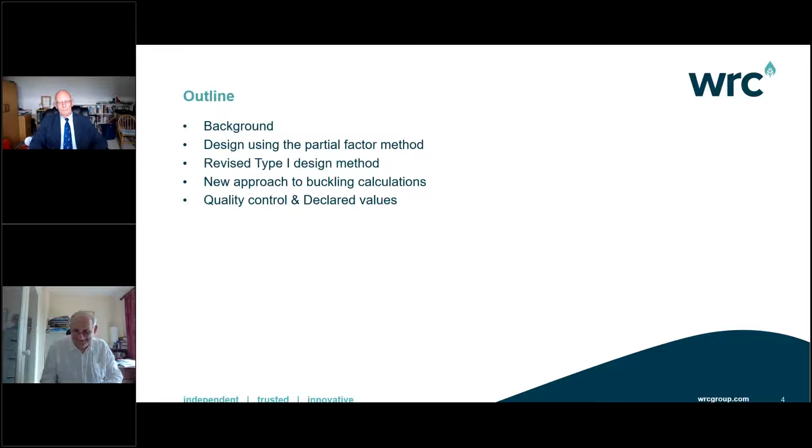I'm going to go through just a brief introduction to SRM for those who are not familiar with it, and then look at some changes to the design methods, and then finish up with a bit on quality control.

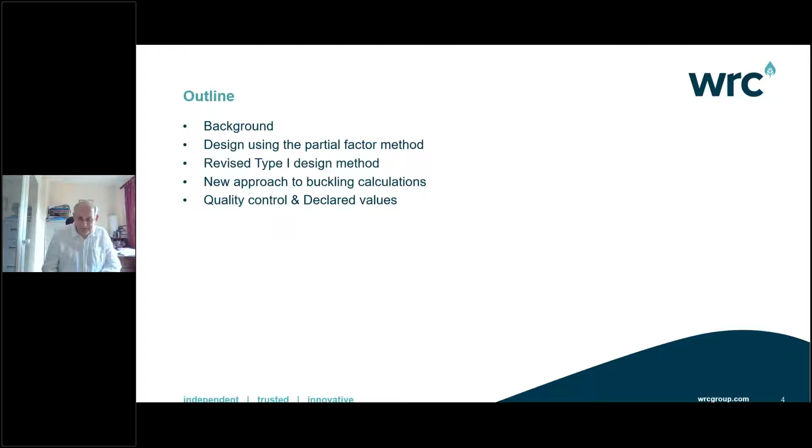So first of all, the background. I remember in 1983, my boss bringing me this red book and putting it on my drawing board, saying, I think you need to read this. That was a long time ago. It's now in its 6th edition, which is only available online at the moment.

There's been relatively few changes to the calculation methods since that 1st edition. This new 7th edition, which will be in a book, changes that.

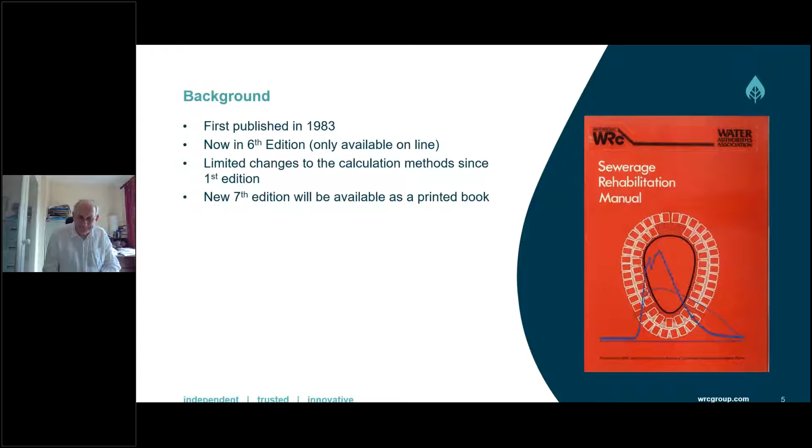So first of all, changes to the design methods. We're moving to design using the partial factor method. So most structural design methods for sewer liners in Europe now use a limit state approach using partial factors. The sewer renovation design methods in France, the ASTEE, and in Germany, the DWA method now use this approach.

Also, we're applying the principles of the Eurocode design approach. This isn't a Eurocode design, because for it to be a fully compliant Eurocode design, there would have to be an appropriate part of EN 1990 series to match it. But it's taking the principles out of EN 1990 and applying them to this design method.

It offers a better understanding of the variability of the material properties, which, given that some of the materials are cured in place, either as grouts or as a cured in place liner, is quite important. Someone's described it to me once as complex chemistry in the bottom of a trench.

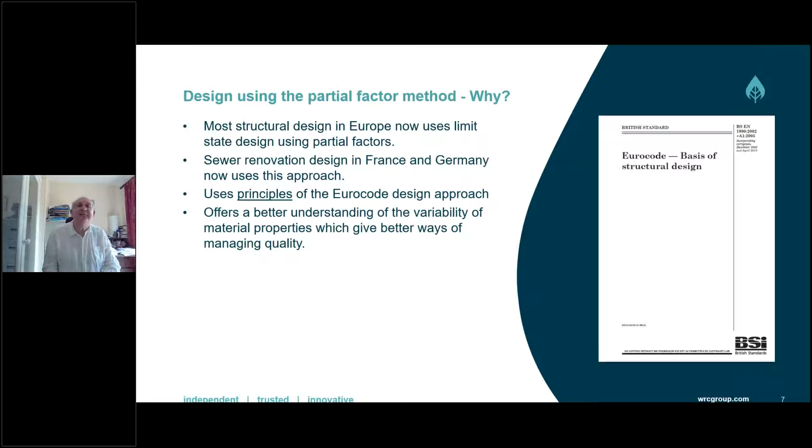A little bit about design by partial factors. Basically, characteristic values are either the highest, the 95% fractile, the value of which 5% of the results are above, or the lowest, the 5% fractile, where 5% of the results are below. So the normal one will be the 5% fractile value. That's the safe one. But occasionally you might have a value where a high value gives you the worst case, and in that case the 95% fractile value is used. That's all standard stuff.

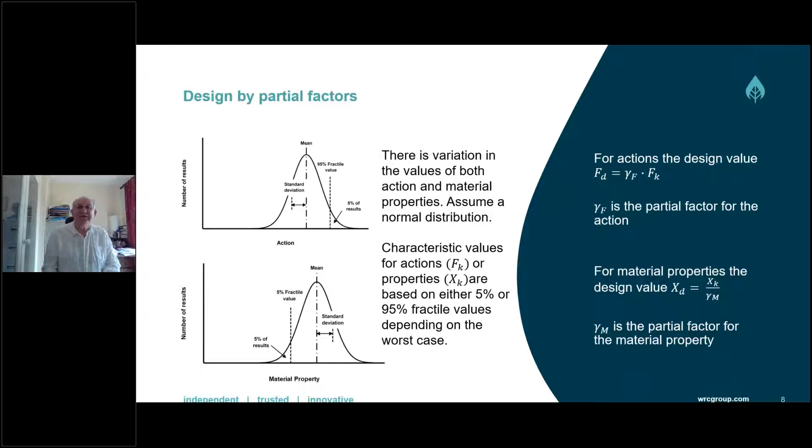So first of all, characteristic values for elastic modulus. There's a bit of a complexity here.

Hitherto, we have used the mean value of the test values, and in normal cases, that is what EN 1990 would recommend. However, there is a note that in some cases, a lower or higher value than the mean for the modulus of elasticity may be taken into account, e.g. in the case of instability.

In a buckling limit case, where due to external water pressure or grout pressure the liner would implode, the limit state is an instability limit state. So for that, we're recommending that the lower characteristic value should be used for design. In other cases where it's just used for calculating other properties, the mean value would continue to be used.

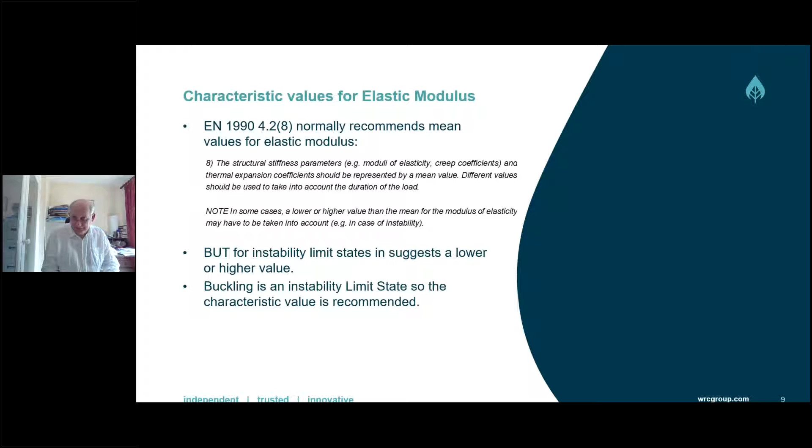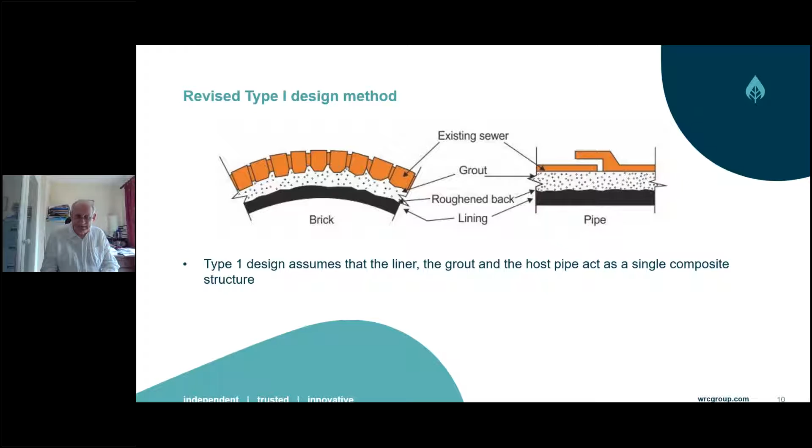So let's now look at type 1 design first. As a refresher, type 1 design method is where the existing host pipe, the grout and the liner are used as a single composite structure. This requires a bond between each interface for that to happen.

The key changes are that we've updated the traffic loadings. We've assumed that cracked structures are fully grouted, so when you're grouting the annulus, you're going to be grouting the cracks in the host pipe, so that the whole composite structure is a rigid structure. We've got a new method of calculating the design bending moment, and more importantly, a more rigorous method of calculating the section properties of the composite structure. Finally, there is an additional limit state for strain at first break, to ensure strain compatibility of the liner, the host pipe and the grout.

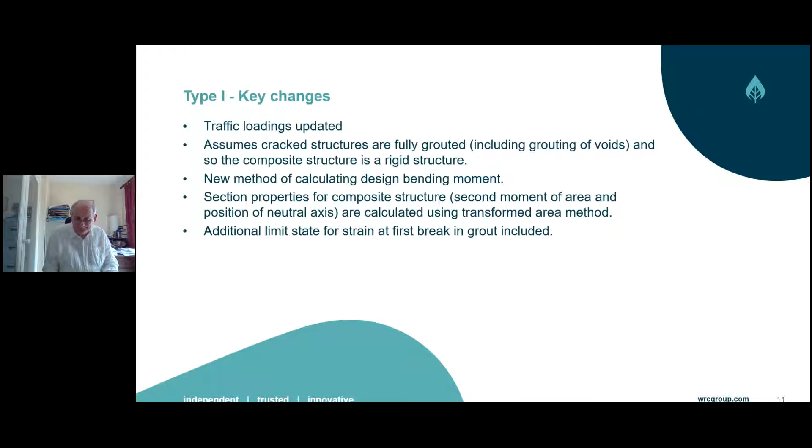Updating the traffic surcharge loads: the traffic surcharge load is now in line with EN 1991. These are higher than the original SRM values, but reflect changes in the standards since then. Design loads are given for both field loading and highway loading, in line with BS 9295, the most recent 2020 edition. If you want to consider other loads like railway loadings, you can go to BS 9295 and use that to produce those loading cases.

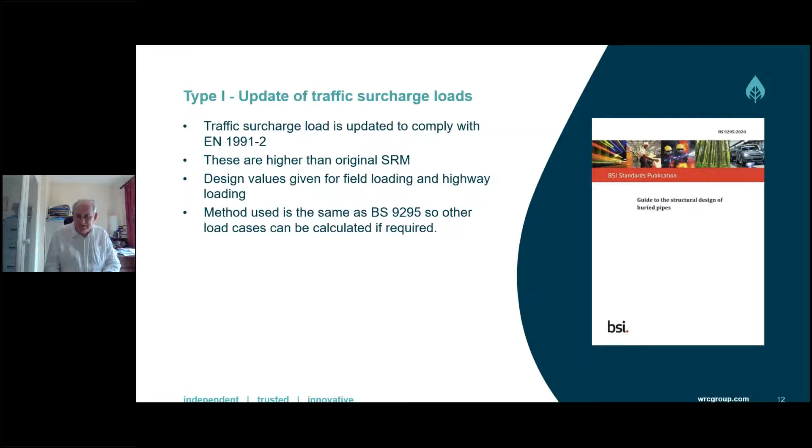For the design bending moment, the new method uses the method developed by Moore and Doherty in Canada, which essentially likens the composite structure to a new pipe. They've done work on that and tested it in conditions, and it produces something that is nice and simple to use for circular pipes.

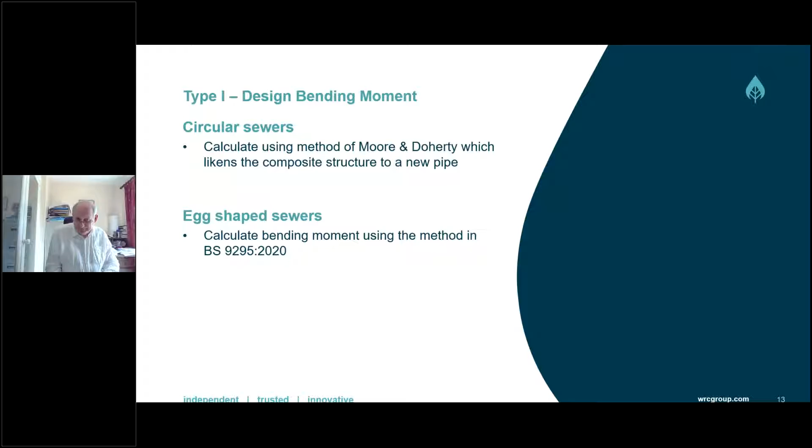For egg shapes, it's a bit more complicated, but fortunately BS 9295 provides a very nice method for calculating the bending moments for those, for a 3x2 egg. I realise this doesn't cover some of the more exotic shapes, but it does cover the vast majority of shapes in use in the UK.

A little bit about strain compatibility. If a liner has a low elastic modulus and the grout has a high elastic modulus, then before the liner has had a chance to take up the design load, the grout would have had a strain beyond its crack value, so the grout would have cracked and you no longer have a composite structure. So we've introduced this additional check on the strain at the grout interface between the grout and the liner.

This effectively derates liners with a low elastic modulus, so particularly GRP liners in type 1 will have a much lower design value because of this.

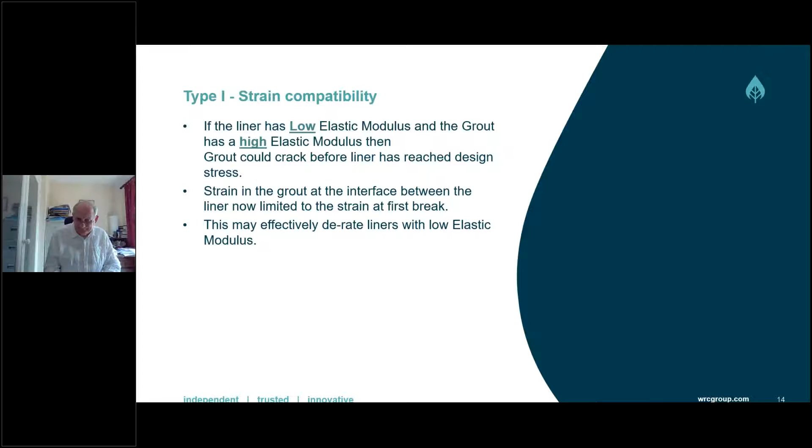Going on to type 2 design, I'm not going to introduce these as things we've changed, because the first one is things we haven't changed. It was suggested that using the highest hydrostatic load was too conservative, as it doesn't happen very often, but we've looked at that, and I'll go into that in a minute. There's a new method of calculating buckling resistance, and this new method also applies where buckling takes place in type 1 and type 2 liners.

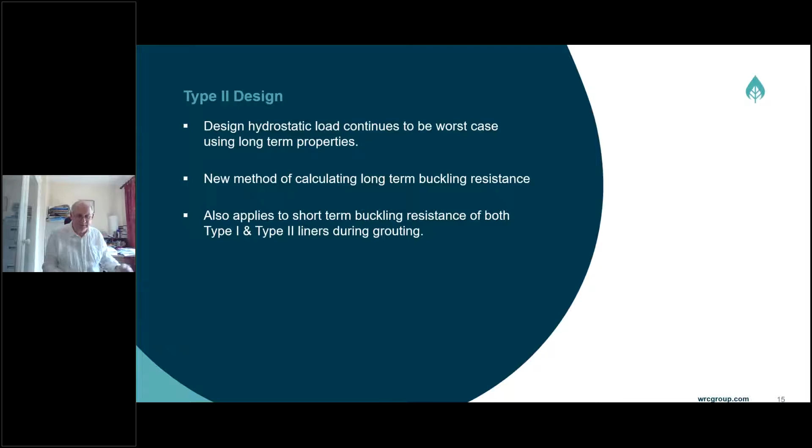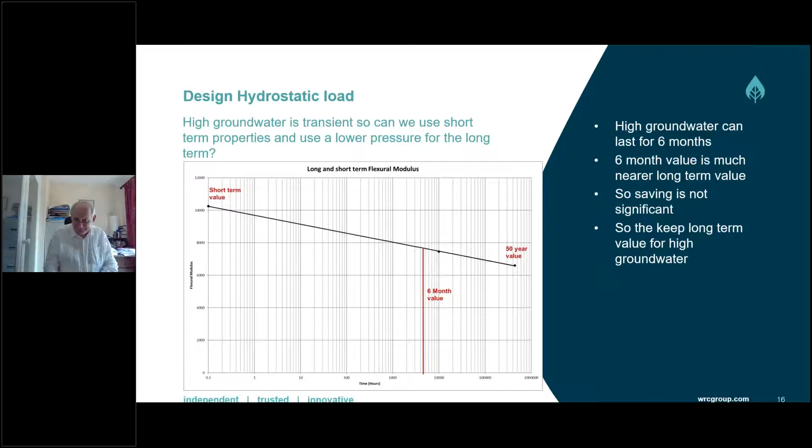The most significant change is the change of the equation used for buckling resistance. Hitherto, we've used the unconstrained buckling formula from Timoshenko with an enhancement factor to allow for the constraining.

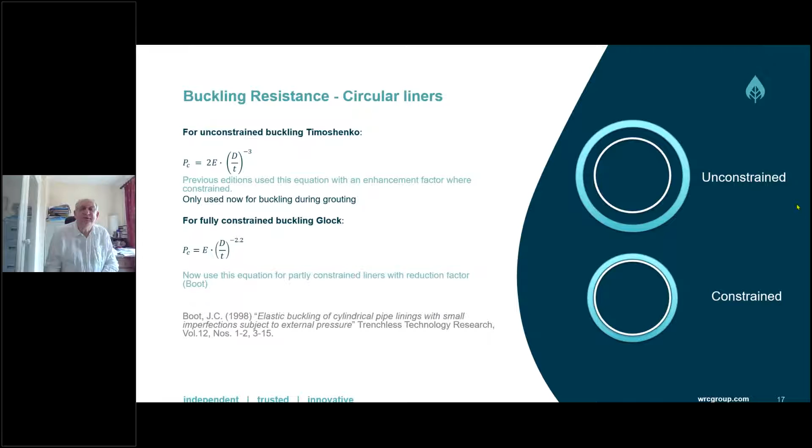So we have moved to this much better formula. Obviously, where you start to have a gap, then you have a reduction factor, and that's built in.

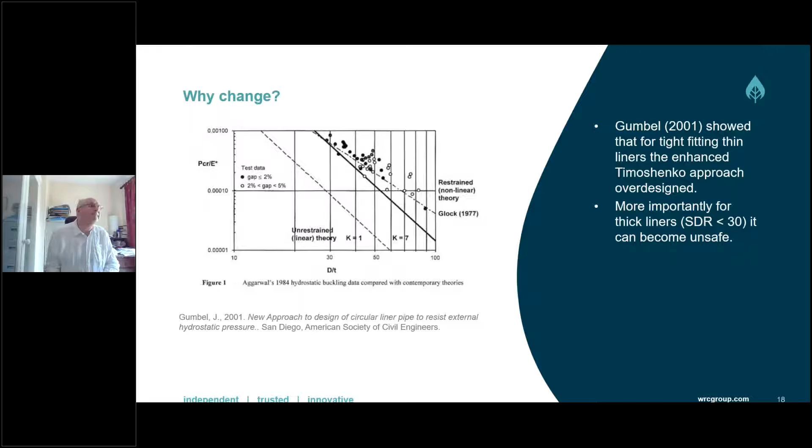So the method is applied by calculating the critical buckling factor from the Glock formula, but applying a reduction factor R, and the full reduction factor is R times two elements, one for the gap and one for ovality.

The gap factors are based on the work of Boot, and Boot also did some finite element analysis work, and using that calculator that he developed from that, we found that the Timoshenko ovality factors could be applied here as well. So that is what we've done.

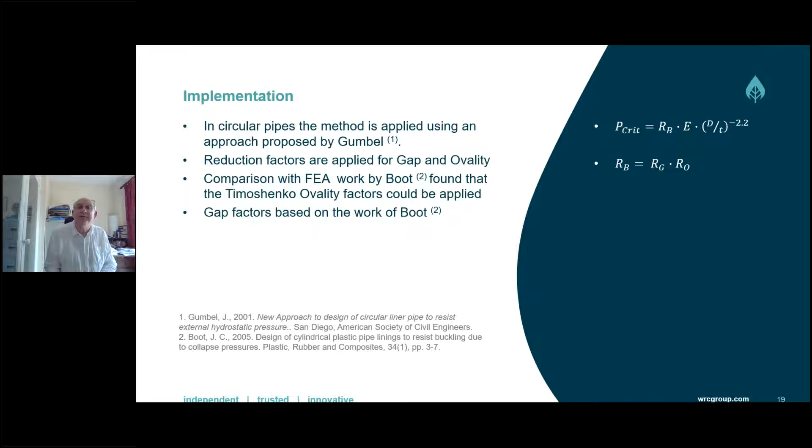For non-circular liners, it's a bit more complicated. Boot identified that there was also a limit state for not only the buckling, but the tensile failure of the liner wall in this critical area here. And so actually with non-circular liners, we've got two limit states here: buckling resistance and tensile failure of the liner.

The software to produce this is quite cumbersome. It would be nice to produce some software for it, but at the moment we've used the software to produce some design charts for 3 x 2 egg.

Buckling again is a similar approach to the circular with two reduction factors, but the tensile failure is more complex, and you have to select a design curve based on the ratio of the elastic modulus to the tensile strength.

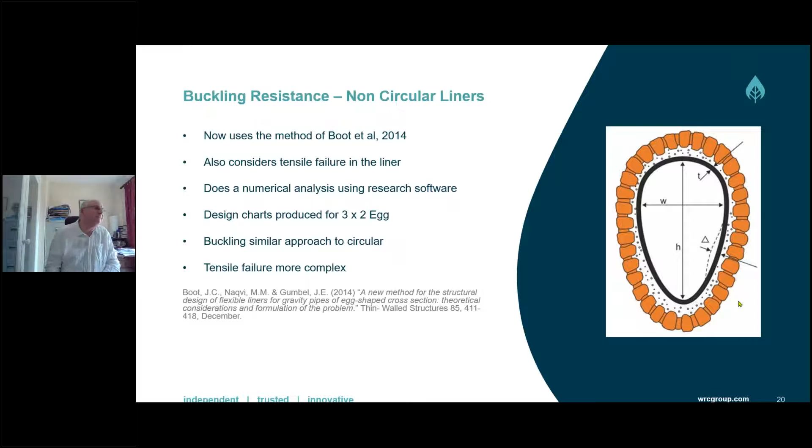So those are the changes to the design method. And now I'm going to talk a little bit about quality and managing quality. This is an area where in the past perhaps we've not given adequate consideration to, and is much more coming to the fore now.

The product standards for liners, the ISO standards, now require manufacturers to declare values for the design parameters. Unfortunately, they don't state how those values should be declared.

I mentioned that renovation often involves this complex chemistry in less than ideal conditions. And there's also a need to understand the difference between the long and short-term properties, because the long-term properties are what we're designing to, but in a quality control situation, you can't do a 14-month quality control test. You have to use a short-term test. And we also need to understand, when we're looking at a small sample of test results, how that fits in with the variability of the materials.

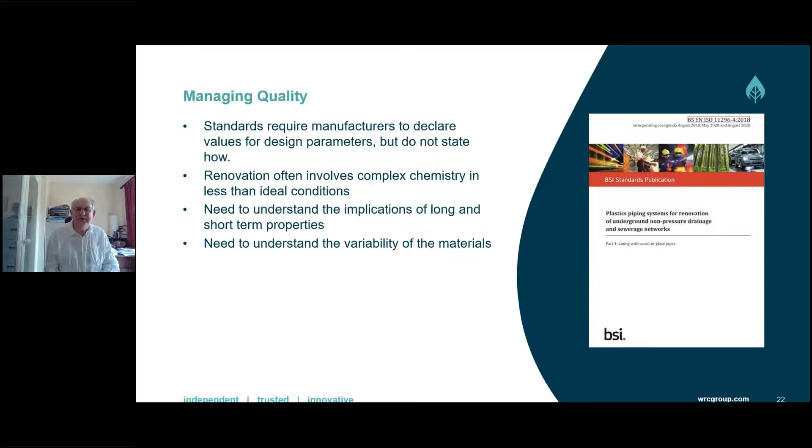So going back to this graph, first of all, we are looking for either a mean or a 5% fractile value, a lower characteristic value, depending on the application we're using.

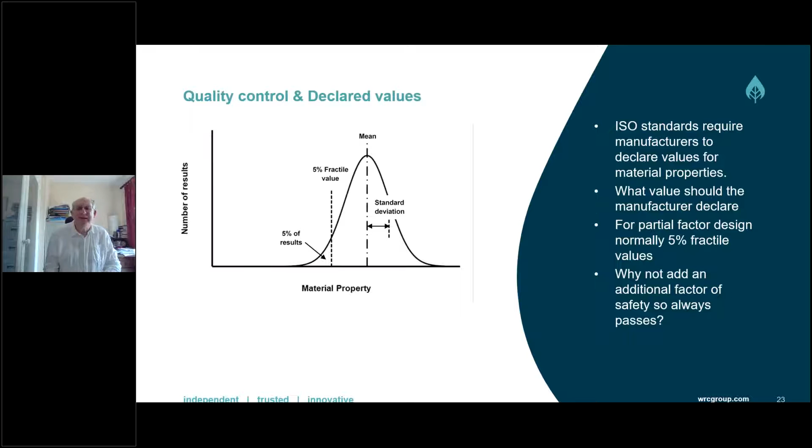The temptation for a manufacturer might be to declare a value that's lower than what he knows he can produce, just to be on the safe side, to ensure that the product always passes. But that is actually a recipe for trouble.

The reason is, go back to this long and short-term property graph here. The short-term value is an instantaneous value. It's a 10-minute test. The longest test we do is a 10,000-hour test, which is about 14 months. And that's extrapolated to a 50-year value.

Essentially, what we're doing, if you talk in terms of EN 1990, is we're applying a fixed conversion factor. We're saying that the long-term value is related to the short-term by this factor, conversion factor, eta.

But that factor is only applicable to a particular product. If your product hasn't properly cured, then there is no guarantee that that value is still the same as if the product had cured. So you could have a product or a sample that hasn't properly cured, that is below what should be the short-term test value, but if the declared value has some added factor of safety in it, it could be that it's not telling you that it hasn't properly cured. And therefore, that conversion factor may not apply.

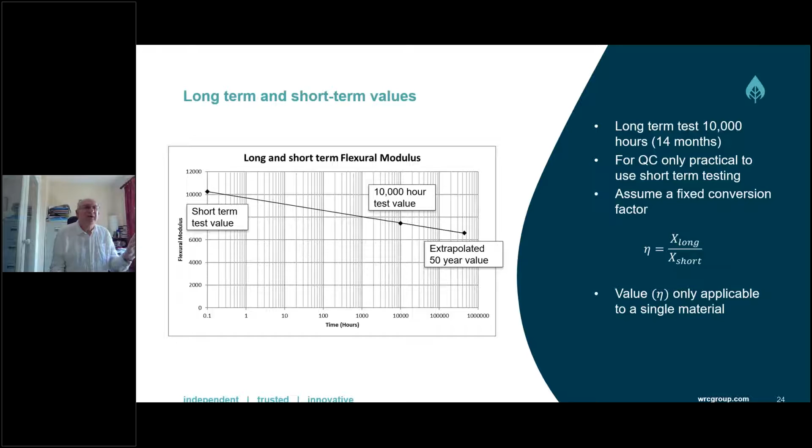So you need to ensure not only that it achieves the declared value, but that that declared value is actually what the product was designed for, that the thing is properly cured. So we need to ensure that that declared value is based on the manufacturer's tests and consistent with the manufacturer's tests of properly cured product.

A partially cured - so I explained that about things. But then you've got the variability of material. Because we're talking about a mean, should we fail something that's less than the mean? Well, actually, no, because half of the products will come in less than mean. What we want to ensure is that it's within that envelope defined by the standard deviation.

And even if it was below the 5% fractile value, it's still - that's 5% of the results are in there. So that's not a reliable test.

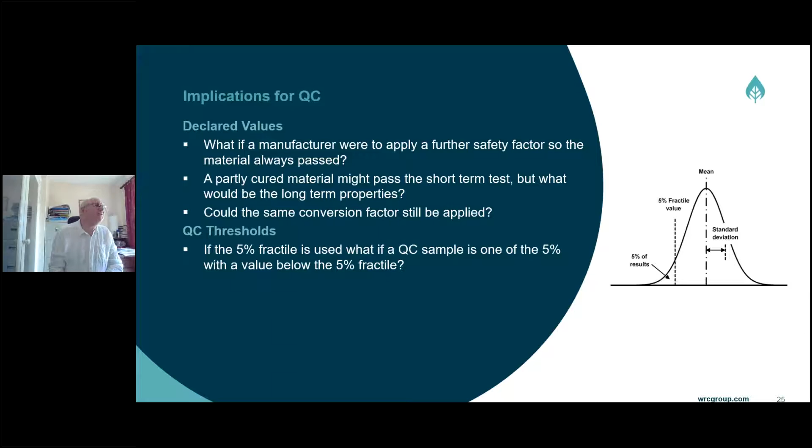So what we're saying is that we need declared value tests for the mean, the standard deviation, and the number of samples tested. We can then apply statistical methods, standard statistical methods, to ensure that the mean and standard deviation of our test values are consistent with the mean and standard deviation of the manufacturer's data. Then we can be sure that we are within that envelope of data to ensure that it's properly cured.

And that means there will be a small number of QC samples that are going to be below the 5% fractile, and half of them should be below the mean. But we shouldn't trouble ourselves with that. That is what we're trying to achieve.

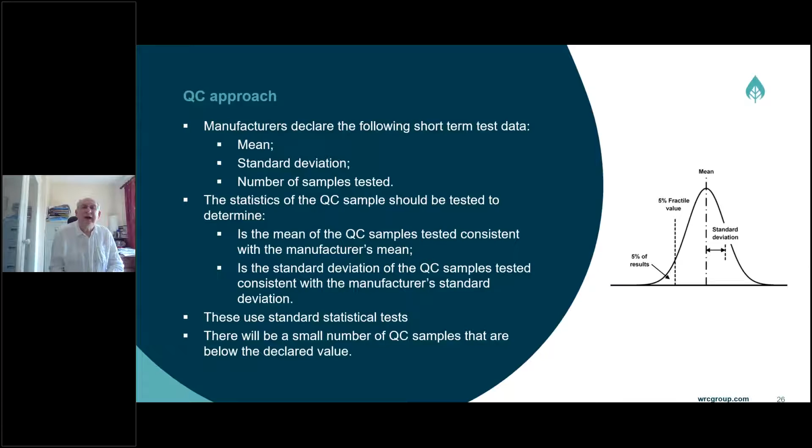And that is essentially all I had to say, which is a bit quicker than I'd intended, but there you are. So we've got time for questions now.

So thank you very much, Nick. That's a very, very interesting presentation. And I'm sure that we will get quite a number of questions. I have a couple that I'd like to ask you, if I may, before everybody piles in with their questions. The revision of the SRM design method has been discussed for quite a while. What's been the driver to finally get this long-awaited action implemented, and what measures will be taken over the next few months or years to get the new methods adopted by sewer owners, their designers and contractors? For example, are there training programs planned or technology transfer sessions, or is it simply a matter of a new document, a new SRM, and there it is, pick it up and work with it?

We are planning some training sessions. They haven't been publicised yet, but there will be some rollout sessions to help people through the transition. The driver, I suppose the final driver was this quality thing. People in the past had been fairly uninterested in the quality, and that has changed in the last couple of years. There's a much greater interest by clients in ensuring that the quality of the work is up to standard, and so that has been the most recent driver to get this done. And where products are WRC approved, we will be working with those when they come up for reapproval to ensure that the stated design values are properly justified, declared values are properly in line with what we've been saying.